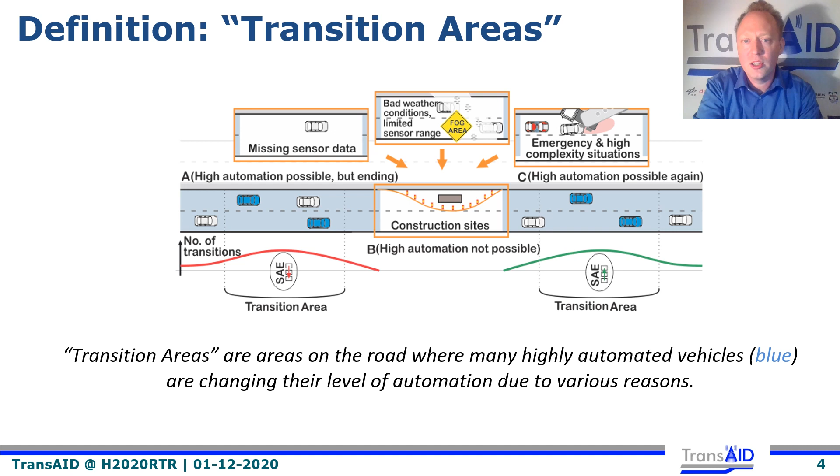For completeness, TransAID is not only looking at effects when the driver takes over control, but also on effects after such situations where several vehicle automations are enabled again. But TransAID is not only looking at the effects of automation limitations of several vehicles, it is also about providing traffic management measures to avoid negative impacts.

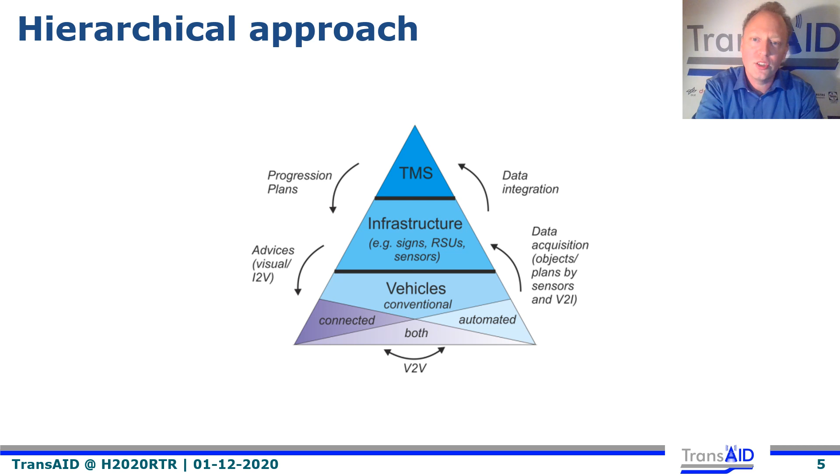In the project, local infrastructure takes over the role of helping the vehicles to cope with the situations. As the infrastructure can be deployed tailored to the situation, it can be equipped with special sensors needed to get a full overview or may have information about how vehicles should proceed driving in the area.

To understand how and where vehicle automations fail and how traffic management measures can be of help, the project in the beginning performed several literature studies, expert interviews, and stakeholder workshops. As results, 3 categories of infrastructure services have been defined. First goal should be to prevent the transition of controls and minimum risk maneuvers on the road. We found 3 different ways of doing this: by providing path information, by providing speed, headway or lane advice, or by separating traffic.

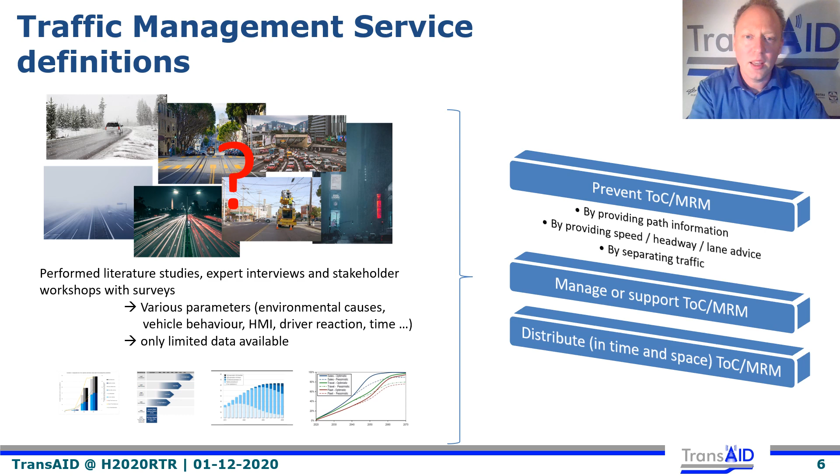Second, if a transition of control or minimum risk maneuver is unavoidable, infrastructure may support the vehicles in finding the best way to stop. Besides, it has been found that a distribution of transition of controls and minimum risk maneuvers in time and space can benefit the situation.

Each service is subdivided into a couple of use cases. This image gives you a rough overview. In the top row, there are the investigated use cases for the prevention of transition of controls by providing path information. In each of the use cases, the automated vehicle, shown in blue, can only overcome the given situation by breaking the law, either by driving on a bus lane or by using the emergency lane for queuing.

In Service 2, the investigated use cases deal with cooperative lane changes and merging, as well as performing a right turn from the wrong lane. The last prevention service, Service 3, deals with traffic separation on highways to reduce dangerous lane changes. And Service 4, an automated vehicle not able to pass roadworks, is stopping in a safe spot instead of blocking

the only free lane. Service 5 deals with the distribution of transition of controls and minimum risk maneuvers to avoid negative impacts of several transitions at the same spot. The service has also been investigated together with Service 4 as the availability of safe spots also requires different times for transition of controls. Each use case has been tested in several scenarios, first in simulation and then in real-world prototypes.

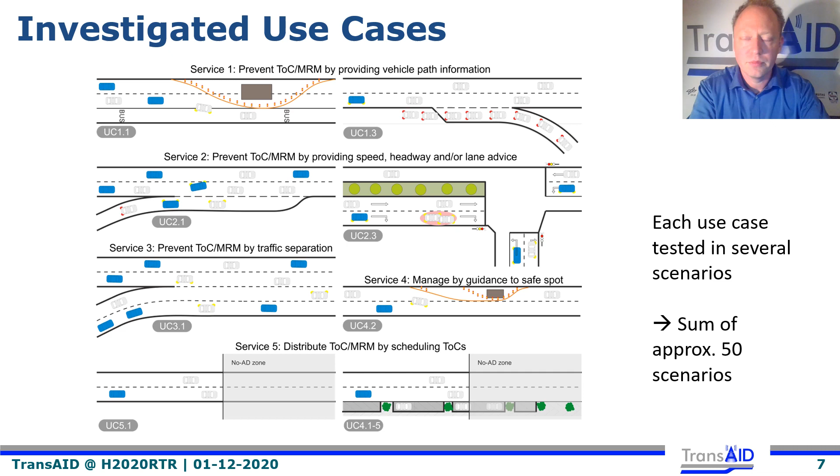But before, several enabling technologies had to be investigated. V2X messages have been designed always adhering to current standards and developments of other projects. Cooperative sensing has been investigated, allowing a collective perception by infrastructure and vehicles. Cooperative maneuvering allows handling of situations like lane changes in a very smooth way.

As the communication is rising, TransAID also investigated compression techniques and reliable communication. But since not all vehicles will be automated from one day to the next, also handling of conventional vehicles was in focus, either by designing external lights showing automation issues or by infrastructure support via variable message signs.

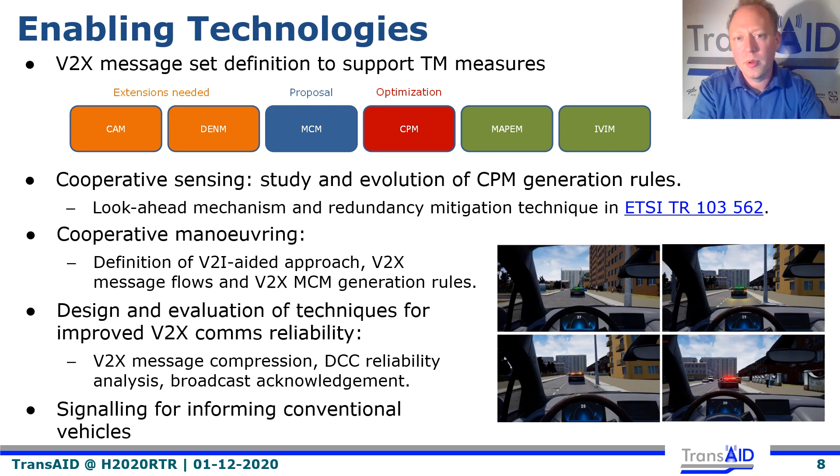During the project, several simulations have been performed. They revealed that transitions of control will have large negative impact when the penetration rate of automated vehicles rises. On the other hand, traffic management measures like those developed in the project will severely improve traffic efficiency again, leading to a higher average flow and speed. Also, safety and emissions will be improved by such measures.

Here, you can see the results of simple transitions of control without and with traffic management measures. In this case, the distribution of takeover requests along the road is in focus. Without traffic management, congestions will be unavoidable.

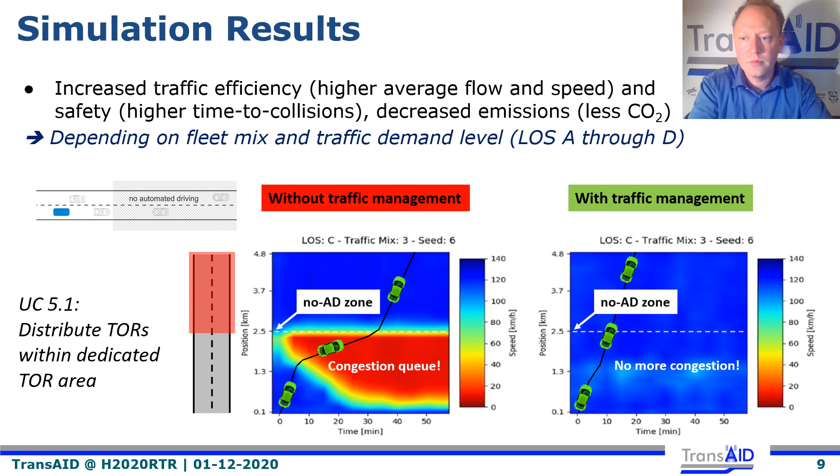Looking closer at some results with more complex simulations, including communication simulations, nevertheless reveals that simulations have to be performed with care. Just simulating vehicle movements and traffic management measures may be simpler and faster, but including a detailed communication simulation will give you much more insights into real improvements.

Here you can see in the very same scenario that communication errors will significantly reduce the positive impact of transition distribution, especially when more vehicles are on the road. But still, the effect is remarkable compared to the shown results on the last page.

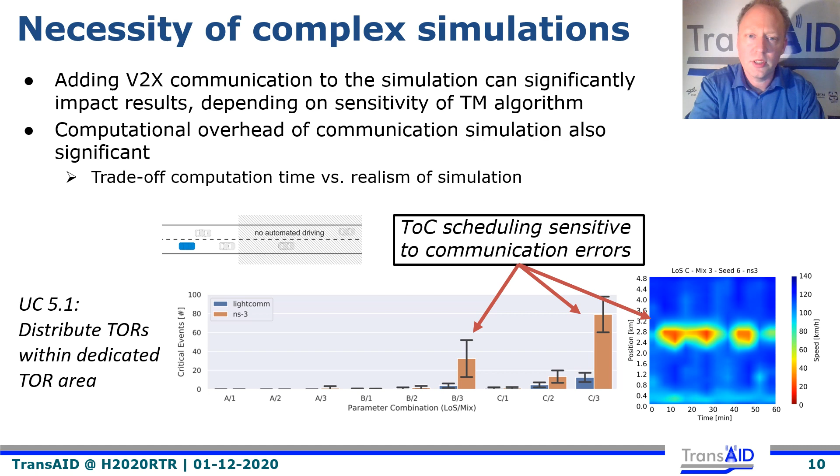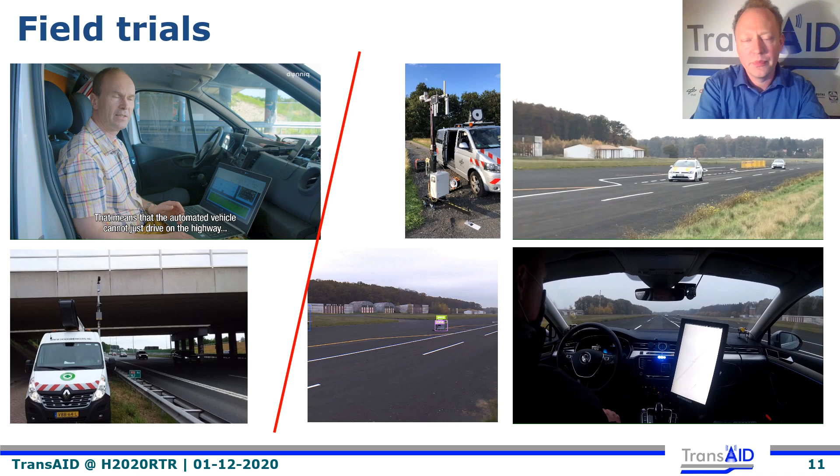TransAID did not stop the developments in simulation. We wanted to know if the measures also work in the real world. That's why we started several field trials where we successfully investigated the performance of infrastructure components like cameras, of communication protocols, and of vehicle automations adhering to the given infrastructure advice.

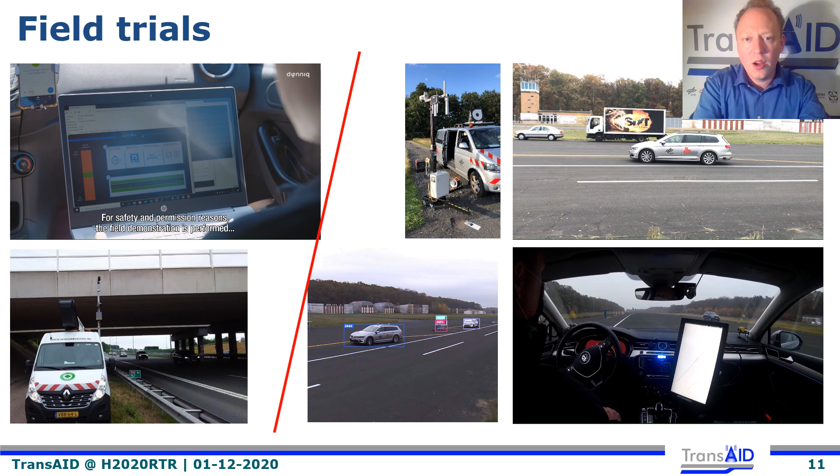On the right hand, you can see an example of a scenario showcased on a test track and dealing with safe stopping positions of automated vehicles in case of occurring minimum risk maneuvers. On the left, you can see a cooperative merging assist showcased on a highway near Amsterdam and in public traffic.

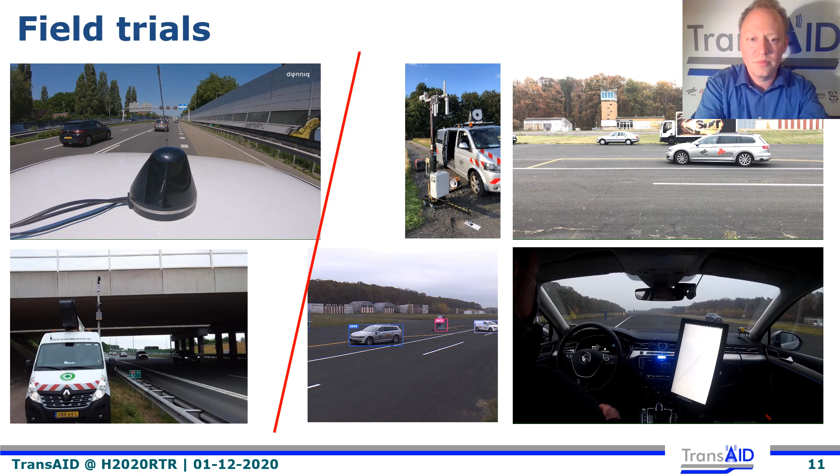As the project is currently coming to its end, we are now taking the necessary steps to bring the results to the market. We had stakeholder consultation meetings before and during the pandemic to prepare this important step. In those, it has been found that the clear definition of operational design domains of automated vehicles, and even more important for transition areas, the exchange of this information with infrastructure and traffic management operators are required.

Same goes for the definition of infrastructure capabilities, as for example done with the ISAD levels in the sister project INFRAMIX. A roadmap and further guidelines for stakeholders will be released at the end of the project. Transition areas may be a futuristic topic, but action is required now to allow a smooth introduction of automated vehicles.